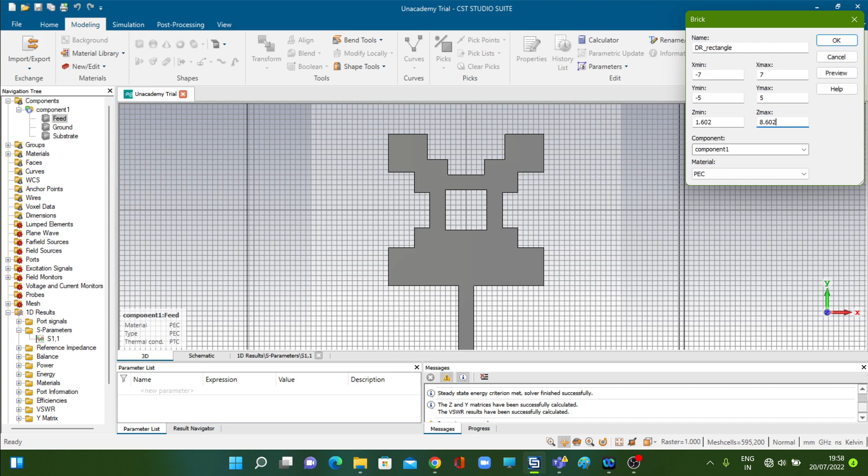Again, we will not do anything with the component. But certainly, this dielectric is not a metal, so we need to change this PEC. We will put the drop down. Now this is not FR4, because the FR4 dielectric is defined for the substrate only. We will not define the same dielectric for the dielectric resonator also. We have to select some new, different dielectric.

So what we will do is load the dielectric from the material library. Load from material library. Again that list comes. You may have different options here, a wide range of options.

Now, the most commonly used dielectric for preparing these resonators is alumina or quartz. So let us select alumina only, which you will find at the very beginning of the list. See, alumina loss free, alumina lossy.

Again loss free, again lossy. What is the difference between these two lossy varieties? See this percentage, how much lossy it is. This one is 99.5% pure, that means 0.5% lossy. This one is 96% pure, that means 4% lossy.

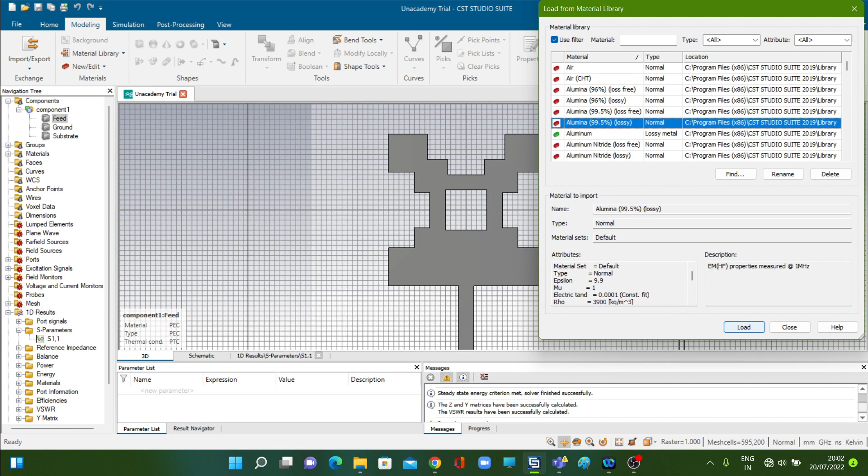Now you should load. Now when you load, this alumina comes under the material. We have defined it properly. Now let's preview - see, this outline comes, that means the structure is properly defined. Now if you press OK,

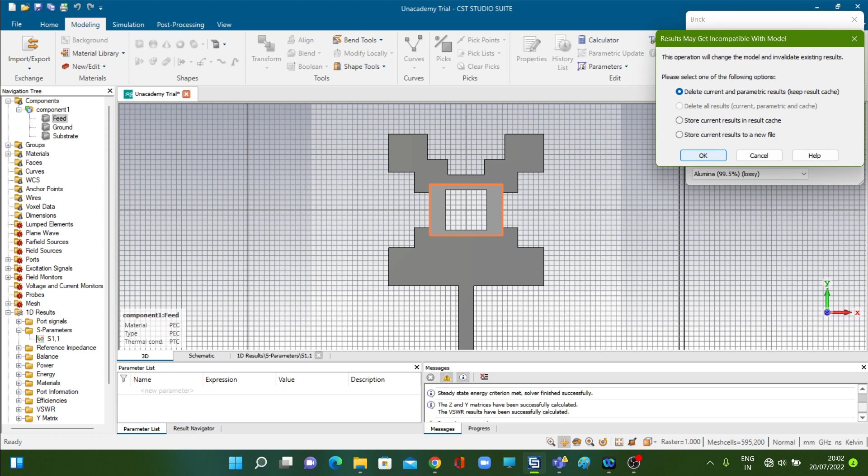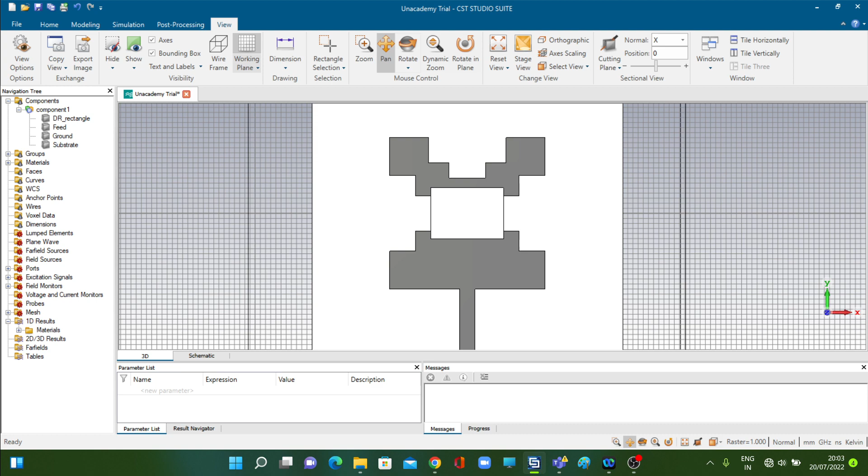already simulated results were there, so it is asking whether we should delete those simulated results or not. You can choose your option. Let me delete because I will start the simulation from the beginning. See, it is getting defined. Now if I rotate it, see, it is getting defined.

Can you see this dielectric sitting on top of the patch like this? And it is rectangular. Now here we may get confused on one thing - the substrate, this substrate and this dielectric resonator block, they are of the same color actually. So we can change this color.

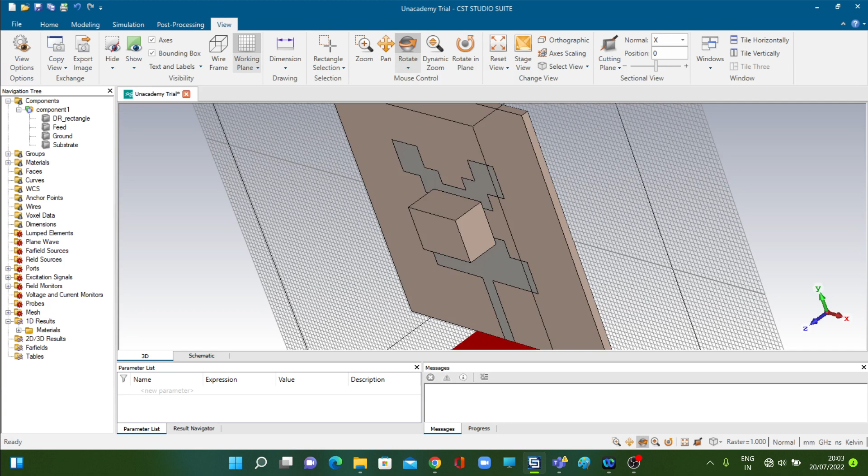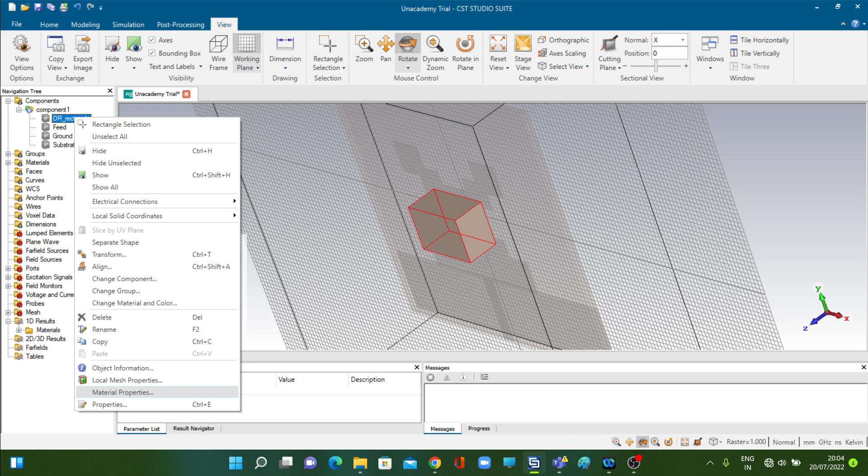I mean, we can right click on this dielectric. Under component, this dielectric rectangular is there - the way we name the structure, dr underscore rectangle. So we right click on this, and from the pop-up window, we select material properties. See the second last option, material properties. Let's select it.

The window that opens - see, epsilon mu is there. You can change the value here. If you want a higher value, you can do that. I can make it suppose 15, possible. If I apply, this new value will come. For the time being, I'm not doing that.

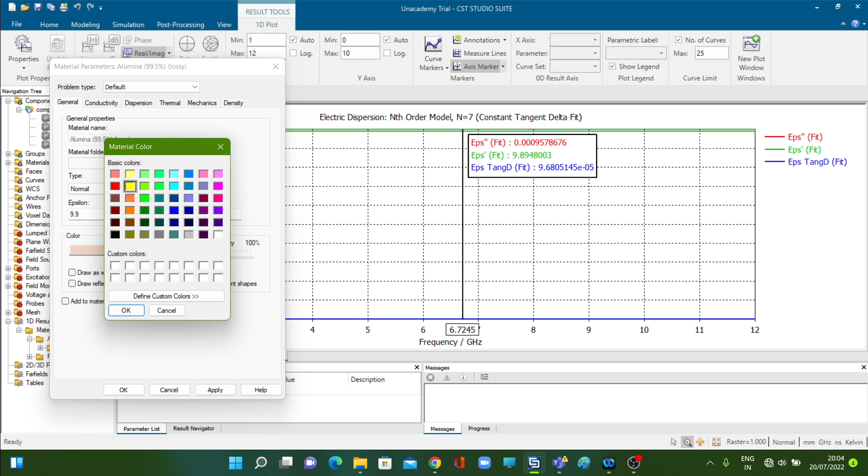It can be done. See, color is there. Select on this bar. These color bars are there. Now select any particular different color, which should be different from the substrate, identifiable from the substrate. So let us select this yellow one. Put OK, this yellow is selected.

Apply, OK. Now it will not be shown here. Again go to components - now see, the color is different. So in this way, you can actually identify different components by assigning different colors to them.

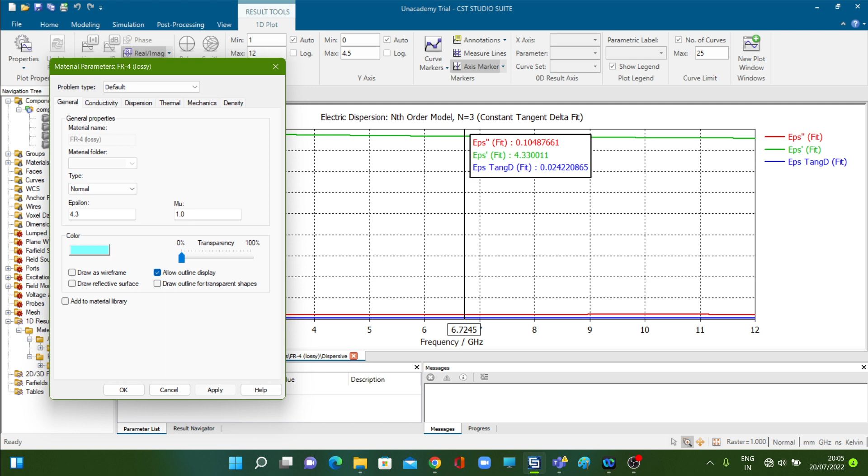I can even make the substrate differently colored if you want, if you don't like this pink color. For example, right click, material properties - by default, this pinkish color will come. Let us say we are selecting this light sky blue. Apply, OK. Components - now see, whichever you want, you can do, but it should be identifiable, because if you want to create any particular design, that design should be identifiable as separate components in your overall structure.

So this is the overall perspective view. Now, if I show you the front view, see, as planned earlier, this dielectric is completely sitting on the patch. I mean, if I show you the patch now - see, this is the patch. Not the patch, sorry, the slot.

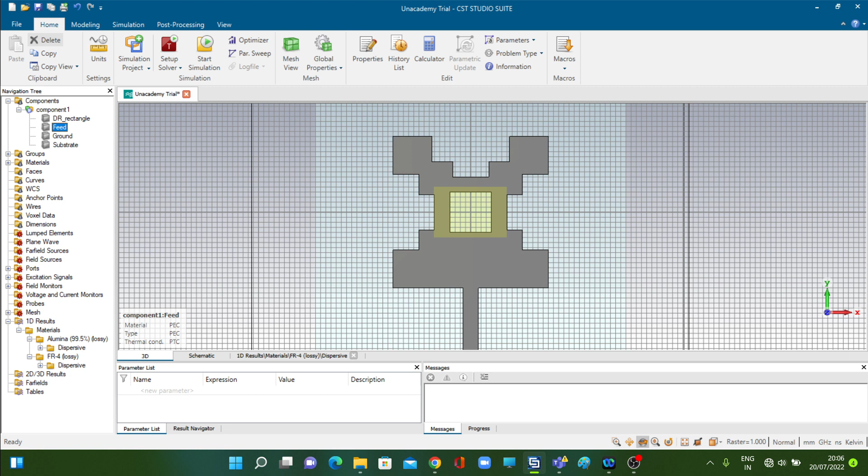The dielectric is sitting on this slot and it is hiding the slot completely, which is what we planned, which is what we intended to do at the beginning. Now if I select the components, see, the slot cannot be seen now. So this is the perspective view. And so our dielectric resonator, rectangular dielectric resonator, is actually prepared.